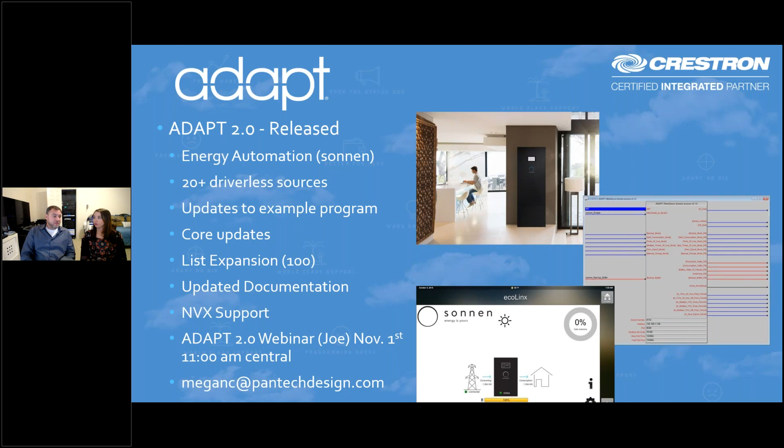Yeah, we really want you guys to attend that. Joe's going to do a deep dive on what I think a lot of the questions have been on the forums and stuff like that. He's kind of wrapping that all up in a nice bow for you. He's going to be talking about how you can do a hybrid approach to upgrades. I know that's kind of a big thing where maybe you don't want to have to go through and do every module, you just want to be able to do the core. There may be ways that could help you guys speed an upgrade along. So we really want you guys to take advantage of that. So get signed up for that and help yourself out there.

And for those of you that don't know, Joe is one of our master level programmers and developers. Yeah, he's also our trainer. He's definitely a jack of all trades. Guy's amazing, tons of fun to talk to, and really keeps things focused, staying on point. So good time value when you spend time with Joe.

All right, well, so without further ado, let's hop into energy automation and talk a little bit about smart weather forecast and backup. We're going to talk about smart configurable backup, but we're not today going to talk about smart demand control and load management. We're going to save that one for next time, that one's a little deeper. Once you understand the smart weather forecast and backup, and you understand smart configurable backup, you'll kind of get the smart demand control and load management. But I was kind of afraid I might not have enough time to do everything I wanted to do in this 1 hour that we have together, so I'm gonna save that one for next time.

So little refresher for everybody on smart weather forecast and backup. If you've attended an Adapt chat recently, you've probably seen this slide, but I kind of spent a little time on it. This time I want to take a little bit more time with this. I'm actually going to show you some things too in the near future that'll kind of help back this up. So one of the beautiful things about Adapt Energy Automation is that we've written a module that you guys get to use for weather alerts.

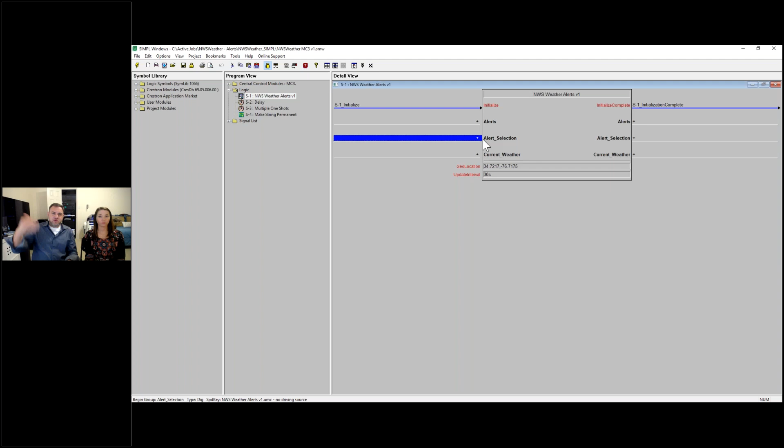But there are cases, I think, where people may want to be able to just use the weather alert. That's a good question. Any other questions? Not for now.

Okay, all right, cool. The last piece of this is current weather. Look guys, we all use Crestron's weather widget and whatnot. I use it, they're on our touch screens. It works quite well, it's kind of neat.

But I think I learned recently that their weather service was broken, and I was surprised by that. My guys told me that actually today in our production meeting. So this could definitely become a lot more useful for all of us in terms of just getting the weather data and information that we need.

And so we are going to be doing some forecast information as well, so that you guys can put it on the touch panel, show it if you want to, or maybe do things to the house based on some of that information. But really, I think the alerts are better for that.

Other questions? All right. Is there a way to test alert conditions and selection extra data without an actual alert? So yes and no. The answer is there's a way to test, but not without actual alerts, because this is real stuff and it works.

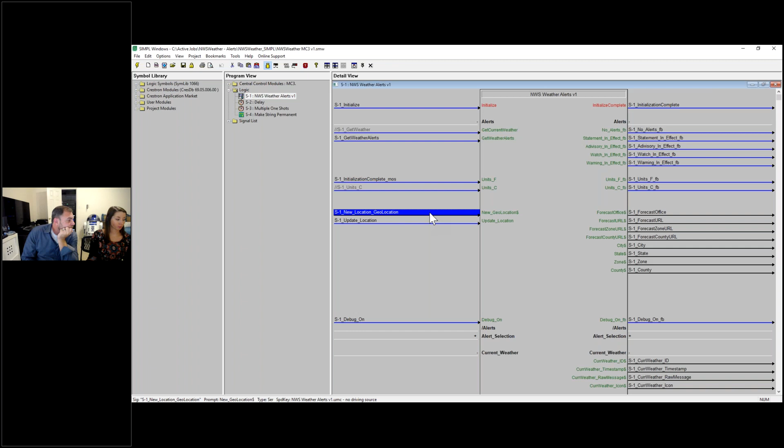Let's see, the non-smart graphics Crestron weather module is broken. Say that again? The non-smart graphics Crestron weather module is broken. Yes, that is my understanding. You might want to confirm that for me, but it is my understanding that that is the case. I'm sure they'll take care of it. You guys know how this stuff goes. I'm sure they know and they'll get it figured out.

Is the parameter just the default, falling back to the new geolocation? So I believe the question is, if I update the new location serial input, does it fall back to here? I don't have the answer to that. That's a great question, I will get that answer for you guys. I think that's probably what it is. Yeah, I got you guys, we'll get that information to you. I'll have to ask Keith.

How do you recall the default location at runtime?

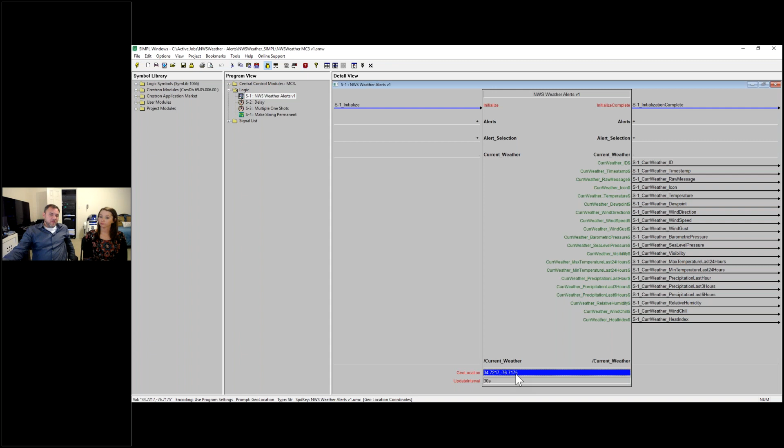Really, at that point, I think what I would do is go ahead and do it outside the module. This is obviously where the thing's going to start up. But if you deviated in terms of another geolocation, I think what I would do is put a default in there on a serial I/O and force it to be the same as the parameter, and then you're covered. So I think that's probably the best way to do that. All right, that's it. Okay, excellent.

Well, we're going to go ahead and move on and do a quick demonstration of this. Some of you may have seen this before, some of you may not have, but here is my Sonnen Ecolinx battery. This is a real live system. I've got a simulated weather event. Obviously, you see there, it's nice and sunny here in Texas right now, but we'll simulate that. But before I do that, I did want to make sure.

Okay, so I do have my backup buffer set to 20%. Now, my house, the use of my battery is strictly for backup. So normally, I'm just going to be here. But I want to show you some of the automated nature of the energy automation in Adapt.

This would normally be done when the customer is in time of use mode or multiple time of use, doing this daily cycling operation of the battery, where we're either taking stored sunlight from solar or taking grid power when it's inexpensive during the day, and storing it in the battery, then later in the evening during peak time, which might be between 5 and 9 p.m., we're actually going to use the battery to power the loads instead of the grid.

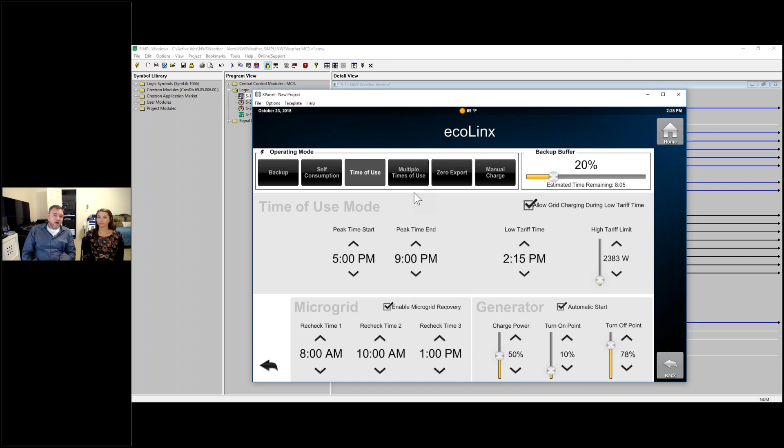If they have solar and they're using stored sunlight, you store that sunlight and load shift, or use the solar power later in the day during that peak time. So that'd be kind of the normal use of a time of use situation. Me, on the other hand, I'm backup, but you see that I'm going to leave the backup buffer alone.

We'll go ahead and simulate this weather event and see what that looks like. So now this thing's telling me, hey, we've got severe weather detected. Do you want to set the backup buffer to 100%? Yes. Now I'll pop over and you'll see, hey, we're now at 100%.

And again, like I said earlier, you guys can program all kinds of things to happen when a severe weather event occurs, and it could depend on the alert, right? If, like I said earlier, it's snow, you may want to do the snow melt thing. If it's severe weather where we think we're going to lose power, then we maybe do some other things.

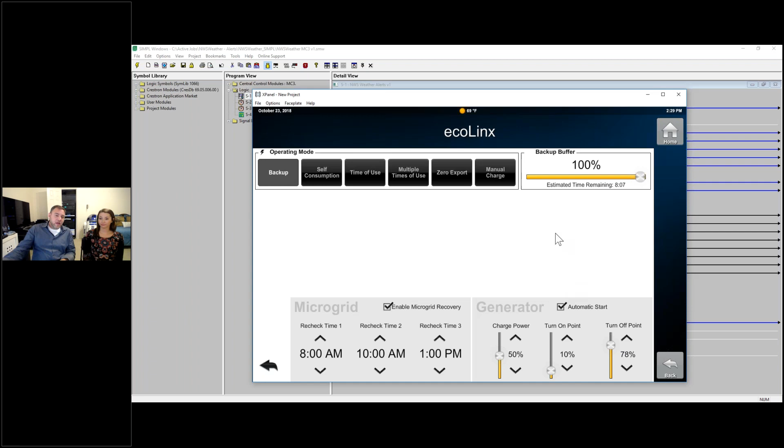So it's all about you guys and your abilities to design the energy automation system in the right way for the customer. A lot of times it's going to be based on the customer, and also based on location. Okay, so when that's over, this can return back to 20%, and away we go. In my case, I leave mine, like I said, at 100, but that's the idea.

Now, let's just say for a second the customer does not want any interaction, because that's going to be a possibility for you guys too. There's absolutely no reason why you couldn't come up with a default power profile situation for when severe weather is detected. Just always do these things. The customer knows that's what you're going to do, knows what the house is going to do, and everything's cool. And there's nothing wrong with that. You don't even have to pop anything up on the touch screen. You don't have to ask them any questions.

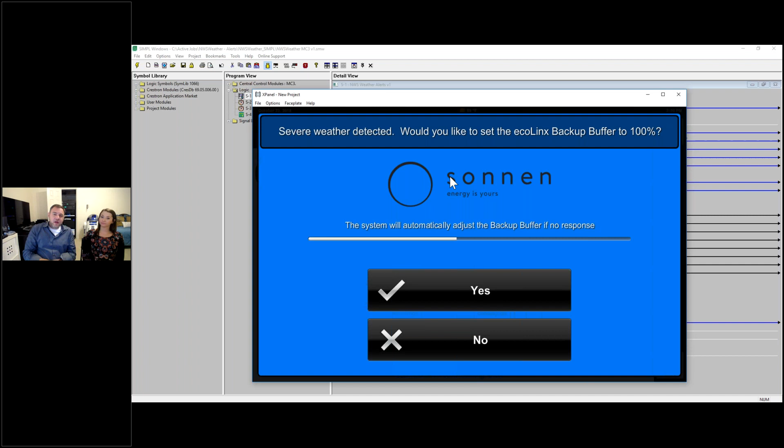We did something at the show where we flipped this around a little bit. Instead of asking the question, would you like to set the ecoLinx backup buffer to 100%, we actually asked, would you like the house to do some things as well? And that was the yes or no.

So the default was to set the backup buffer to 100% to prepare, but maybe we do or don't want to do stuff to the home, like lowering the shades or lowering the set points of the thermostats, or in some cases raising those to turn on the heaters and so on and so forth.

So I'm going to stop here, see if we got any questions. Keep it coming, guys. Nothing yet? Okay, good enough, awesome.

While I'm on this page, I want to explain what everybody's looking at in case you haven't seen this before. You see the Sonnen battery in the middle there. Down below you see a little green online indicator, meaning we are communicating with the Ecolinx battery. The bar below with the battery icon next to it is the battery life, so I'm at a full 100%. Then based on the consumption of the home, shown on the right where that blue line is, I have an estimated time remaining on that battery of about 8 hours and 53 minutes.

There's a real quick and easy calculation to go through when you're looking at the batteries and power. You'll see here I've got a 10 kilowatt hour battery, so I've actually got 5 battery modules in this thing. I could go up to 20 kilowatt hours, which would be a total of 10 battery modules, but I've only got 5. The simple quick math is 1,000 watts for 10 hours, or 10,000 watts for an hour in my exact case. Then you could extrapolate that to the 20 kilowatt hour battery, and that's how you start to build a power profile.

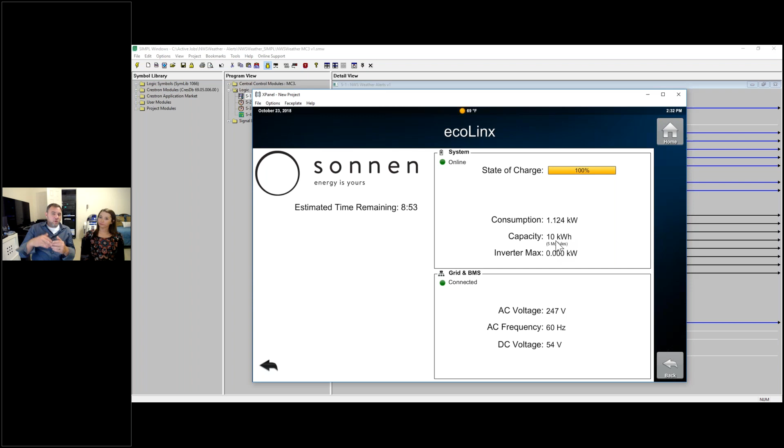When we get into the smart configurable backup, we'll talk more about that.

Last thing I wanted to talk about is just the grid. You can see that the battery is consuming about 1,100 watts from the grid, and the grid is connected, meaning we have grid power. There are actually situations where we'll have grid power but we're not going to actually take power yet, and we'll touch on that here in a minute.

Going back to the weather module, any chance you could update it to use zip codes? That is a great question. I actually wanted the same when I started playing with it, so we'll look into that. I think there's a reason why we did geolocation, but we'll definitely see if that's a possibility. I think it could be a good idea. Yeah, good question.

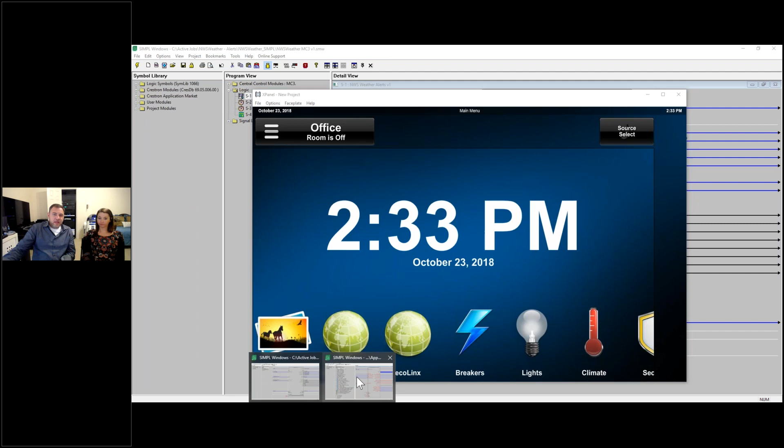Okay, well, I'm going to move us on now to look at the actual Sonnen Adapt module, and then we're going to talk about some smart configurable backup. Bear with me, here we go.

So the Sonnen Ecolinx battery in Adapt is considered an other device. In this system, you'll see it's other device 11 - we have an Adapt other device Sonnen Ecolinx module. Now the module that you're looking at here is 100% done and ready to go, and you don't have to connect anything to achieve what you're seeing my battery doing in terms of giving you the information about what's going on.

I have this backup buffer input in use because I'm actually doing some things based on the weather. So when I say yes, this battery goes to 100%; when I say no, it stays at 20. A lot of that's simply for demonstration, because like I shared with you guys, mine's a backup battery right now, it's at 100%. I am getting solar soon though, so that's going to be really exciting, and I'll be able to share more with everybody about how I've incorporated solar and what I've done there. That's probably going to be another webinar, or maybe 2 or 3, because I really want you guys to learn as I'm learning and have all the information I have.

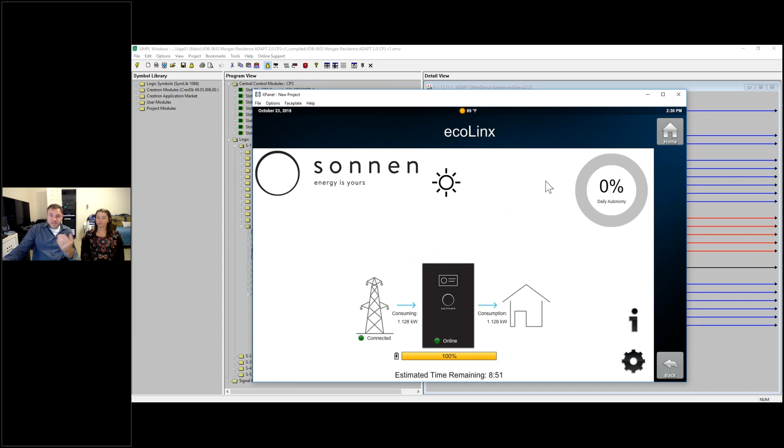You also see the slow poll time and the fast poll time, and you'll notice they're the same for me. Now, the slow poll time and the fast poll time are relative to in-use. Meaning, if I'm physically on the page, I'm going to do fast polling so I get updates every 5 or 10 seconds. If I'm not on the page, the Sonnen ecoLinx adapt module is going to revert back to the slow poll time.

And then, of course, we have our init, which you guys are used to from an adapt standpoint in the adapt modules, and you have a program is ready input. What I chose to do is run that through a buffer, and the reason is I want to have the ability in debugger to turn that on and off. That would be the only reason to do that.

So now that you've seen this module, let's go ahead and talk about the touch screen a little bit, because tying those two together will be quite helpful. All right, so the first page I want us to look at is the main page.

The reason why I wanted to go into VT Pro here with you guys is because there's a few things on my physical touchscreen that you don't see that actually are there. Like peak time active, peak time 1 active, peak time 2 active, low tariff time active—actually I see those are the same, that's a copy and paste error on my part. Anyway, really this doesn't have to be here, and then zero export time.

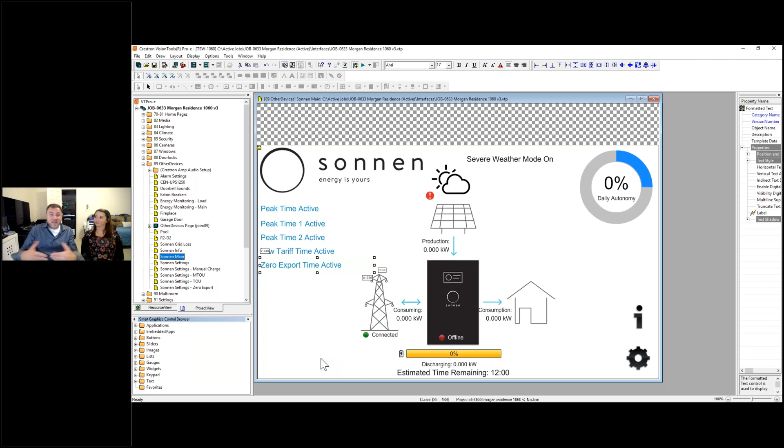These guys normally, and I spread these out, but normally are all stacked on top of each other so they all show up in one place because they are mutually exclusive. We normally put them down here. Obviously, guys, it's adapt, you can do whatever you want, put it wherever you want, have fun, right? But these guys are relative to these things.

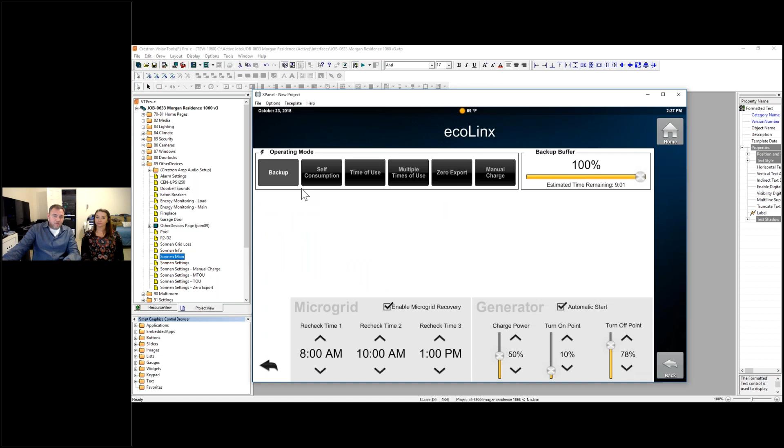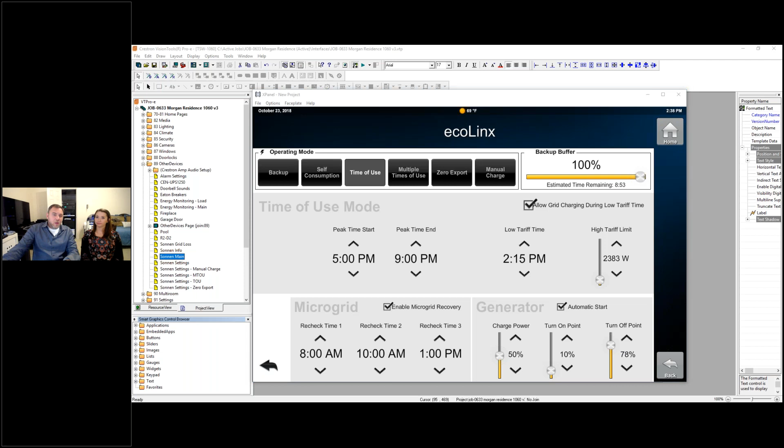So if it was 5:05, I would actually see that my peak time is active—I'm in peak time, right? So that flag is going to go high, physically on the touch screen. And again, you guys could take this and put it on the main page if you want, like maybe put severe weather mode on the main page. It's up to you how you want to make that work.

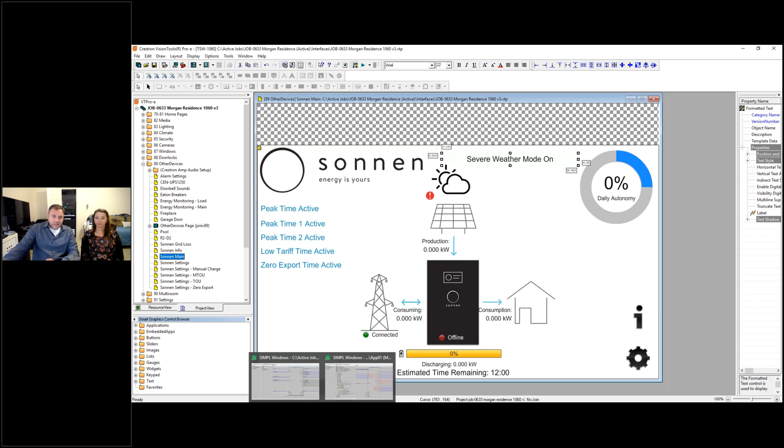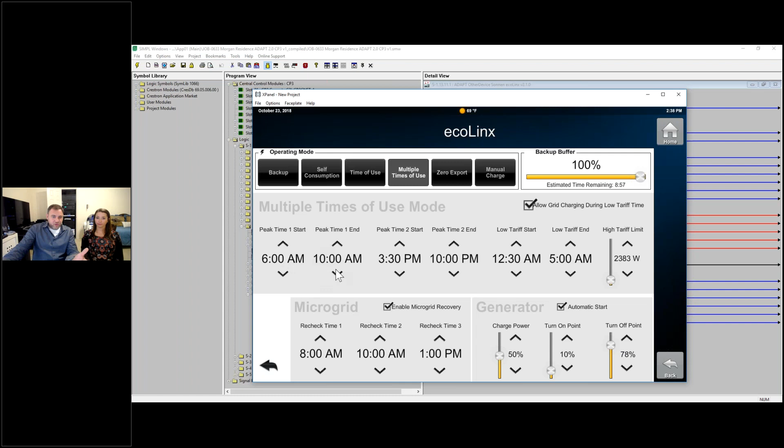The other thing is multiple times of use, so you have peak time 1, peak time 2, same thing applies. If it's between these hours, you will see that flag and it will show up. Again, there's nothing you actually have to do in terms of connecting all of that in SIMPL Windows—it's simply going to be there. You'll have to know the join number, obviously, and I have my join numbers turned off, but you can see there are join numbers there. Just looks a little muddy when I do that.

So any questions about any of that so far?

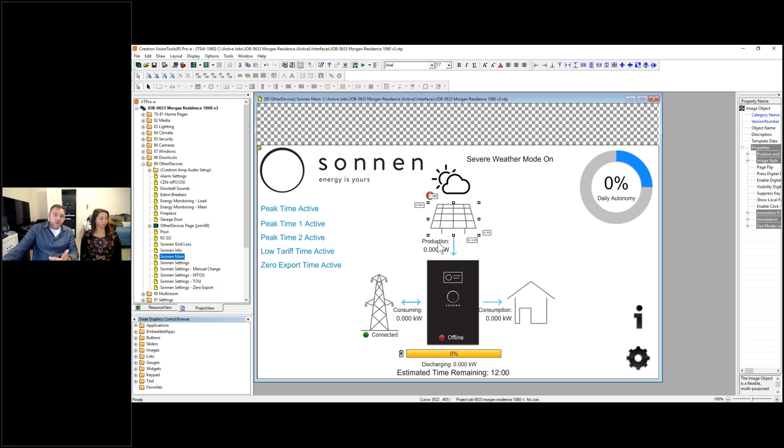There are not. Okay, again, if I had PV or a solar system, you would see this grid and you would actually see the production information. Again, it's something you can't see on mine because I don't actually have the solar. So that's the main page.

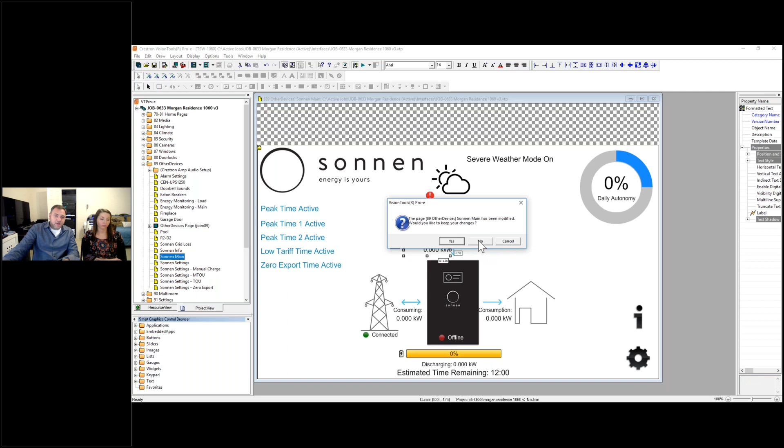The settings page is something that's kind of where the settings start, if you will. And then you will populate inside of this area based on backup, self-consumption, TOU, MTOU, 0 export, and so forth. But you guys get the ability to not have to deal with all that basically because we've already built it in.

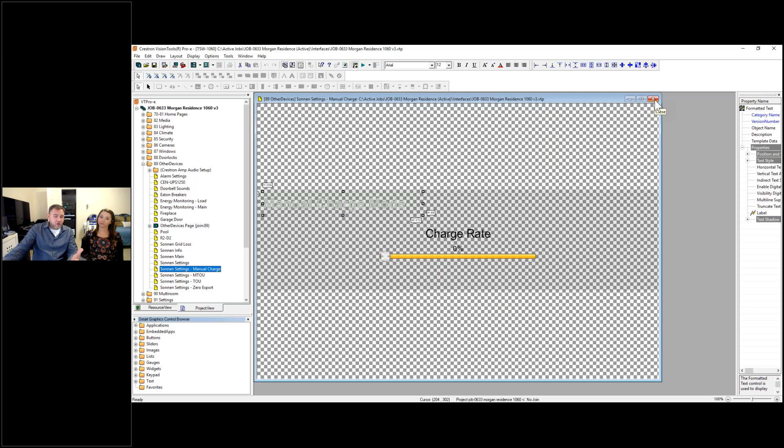So here's the manual charge mode—it's probably tough to see, but that's where you can actually adjust the charge rate. Happens to be something most customers would never do. That's another thing I think I was talking to one of the engineers at SPI, and we were just going through the touchscreen and looking at some of this stuff.

And he said, you know, I kind of feel like these guys just don't need to be there at all—the customer never will do that, it's just not something they would ever do. Totally cool, we get it, we understand. Man, if you guys want to take the buttons off, you remove the buttons, slide this thing over, and away you go. So you get some flexibility there.

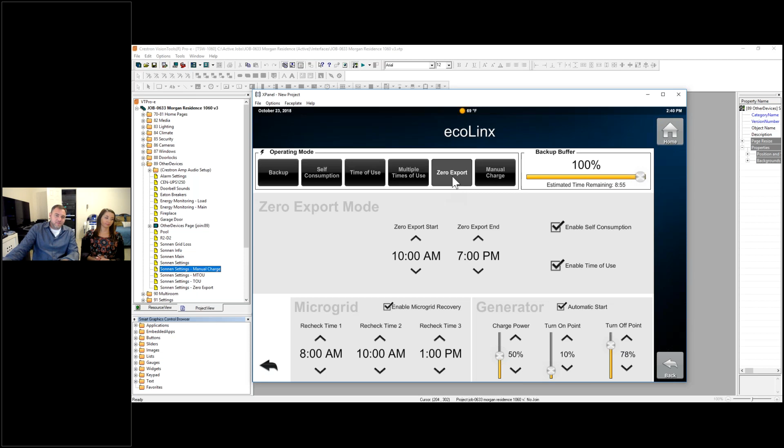Of course, it's VT Pro. Let's talk grid loss.

So when a grid loss occurs and the utility grid is down, this page will go high and is set to join number 415.

My expectation for you guys is you won't have to do anything to make this occur. Having the page pop up, you're not going to have to do anything but use the example program where all these pages exist, put the module in, do the things you'd expect, and it's just going to work. However, the next step, meaning what happens when one of these buttons is pressed, or maybe doing a default and never even popping this page up, that could be something you may want to do.

All possible, but how you actually handle these different power profiles is up to you guys and what you want to do in SIMPL Windows.

So again, back to our Sonnen ecoLinx module, here is your off-grid flag. Once that off-grid goes high, you then are going to use a buffer or some method, however you see fit, to decide, or maybe it's just one thing and that's it. But that's one way to do it.

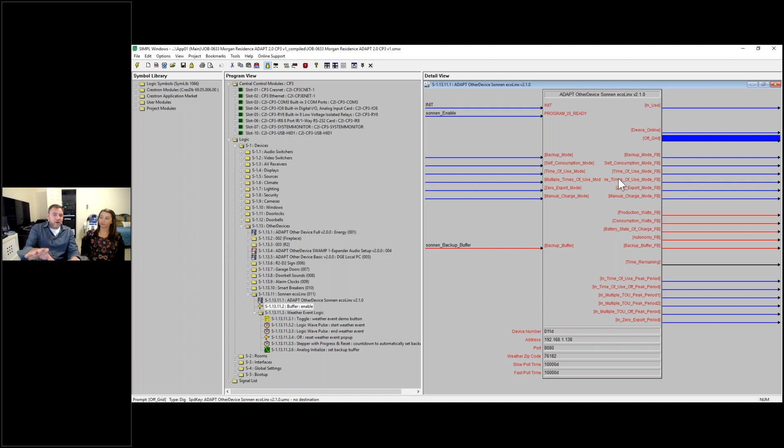Let me show you the better way to do it, and this is where it gets cool. This is where Adapt Energy Automation gets fun. Built into Adapt 2.0 and inside of System Manager, we now have a new automation tab with an energy tab at the top. There will be more added to this, I can assure you. This was just our first step and a step in the right direction.

However, we know you guys want it easy, but we also know you want it flexible. That's why it's Adapt, right? You want the quick stuff, but you also want the power. We've given that to you.

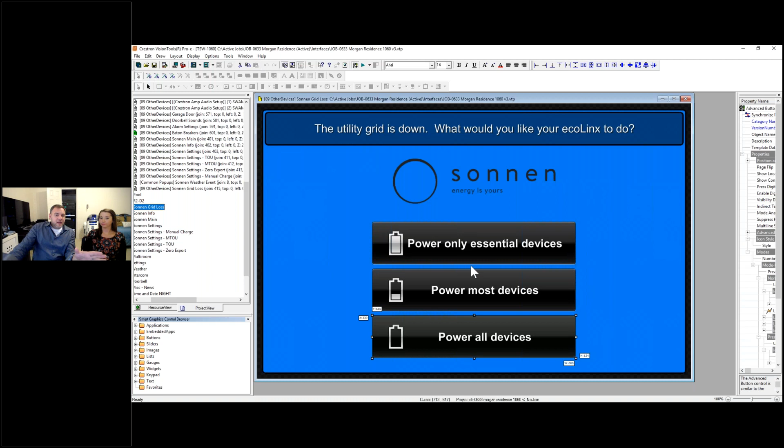So you also have the grid restore. When the power comes back, what do you guys want to do? Some people may not want to do a whole lot. Some people may not want to bring all the audio video back on.

Some people may want to not do anything to the lights. But if we're starting to control breakers and we're starting to do some relay things, and we've turned off the water heater and we've turned off the stove and the dishwashers and all this stuff, well, we may want to be bringing those back on based on restore of grid. So again, ultimate flexibility for you guys, and there will be more things added to this area.

I think we have a question, let's go ahead and answer. Have we looked at what, if anything, you can do for managing use during alert times with Crestron Lighting, D3 Pro, or with SMW?

Yeah, so the question is, have we looked at what, if anything, you can do for energy use during alert times? Oh, okay, yeah. So look, that's the ultimate place we're going. That's really ultimately what we want to be doing, is we want to be making the stuff faster, better, but it's going to come down to us learning more about typical use cases, if you will, and how we can manage use a little bit better.

So take D3 Pro. Well, if I was doing D3 and I wanted to have the flexibility, I'm going to be doing an RSD, a dedicated RSD with just the analogs for the lighting, and that's how I would then build what's going to happen with the lights type of a thing when a severe weather occurs, right? That would be one method, if you will.

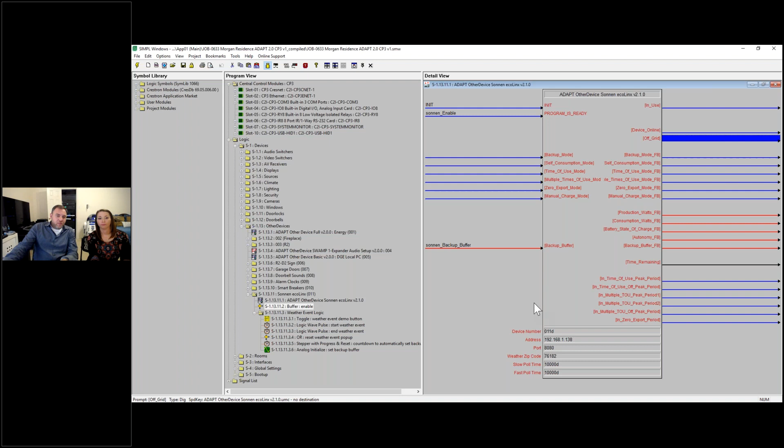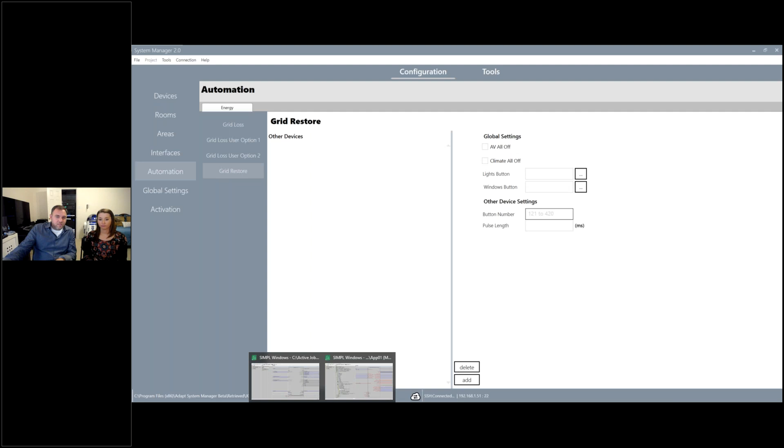Question: where do the buttons 121 through 400 get asserted in SMW? Yeah, these are other device settings, meaning as far as I remember, we're doing that on the output side of an other device module. I'm going to get clarification on that one because I haven't physically done it yet myself, but I do know it's supposed to be very simple. That's a question I think Joe is going to go over in ADAPT 2.0, some of the more detailed programming things. It's a good question, I'm sorry I can't answer it, but that's just because I haven't physically done it myself.

One last thing I wanted to do for everybody is show this in real life. I'm going to go ahead and pull up my X panel and we're going to do a live demonstration of this so we can see what it looks like. Bear with me, I thought I had that open already, I must have closed it by accident.

Great questions guys, keep them coming. Yeah, those are awesome, that's what this is for right here. Exactly. GoToMeeting is always so fun with XPanel, I think they're both resource hogs.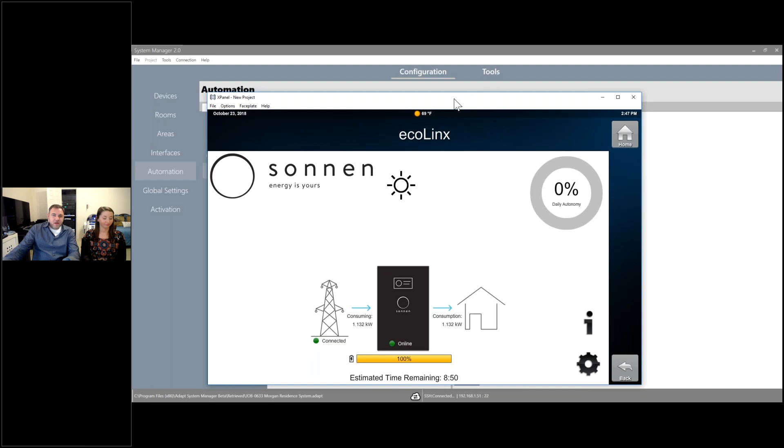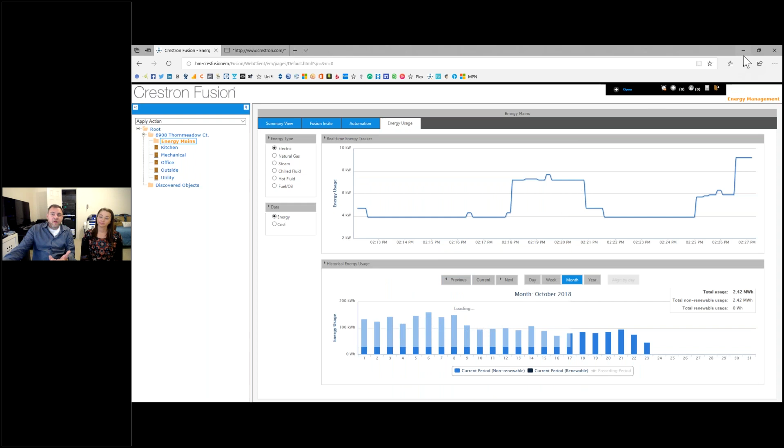All right, good enough. Okay, before I do this, let me share with you guys that the 1,132 watts that you see my home consuming is really made up of that rack of equipment. Inside that closet is also my router, a couple of NASs, my Fusion EM server — maybe we'll get time to look at this stuff. Point being, pretty much the whole system except for my Sonance amplifiers, which I did not put on the battery, as well as my two refrigerators, my freezer, my kids' bedrooms, my kids' bathroom lights, and my family room fan and lights. So when we have a power outage, I can literally sit down in my family room, pick up my 302 remote, and turn on Kaleidoscape and watch a movie. It's kind of surreal, to be honest with you, very neat. So we're going to go ahead and actually do this.

You want to go flip it? Absolutely, all right, so Megan's going to go flip the breaker. And while she's doing that, if you have any other questions, now's a great time. It'll take her a few seconds to get into the garage and flip that breaker.

So what's actually going to happen while we're waiting is within 100 milliseconds of losing power, the ATS is going to flip over and that's going to immediately take us to battery power. And because we're polling every 10 seconds, we might see it happen real fast, or we might see it happen in a couple seconds. So that's the grid going down.

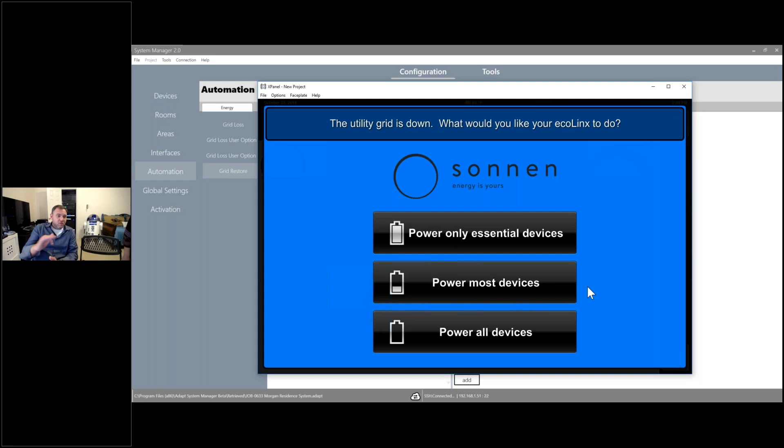Guys, what you just experienced is an online webinar that happened during a power outage, and we're fine here, everything's good. We're live, we're up and running, everything's just peachy. Let's just power all the devices — you'll see here that we're completely off grid at this point. Our battery is discharging at just about the same rate that the home is consuming power, the load on the battery is consuming. We've got about 7 hours, 55 minutes left.

And if we just hang out for a few, we'll start to see this thing going down, and you'll also see your daily autonomy number go from 0% to 1%, and then it will continue to rise. Let's go ahead and flip the breaker back and bring power back.

And guys, I got to tell you, bringing a customer over here, sitting them down, and just turning off the power to the house and putting them in this position is probably one of the best demonstrations you could ever do. It is surreal, it's amazing, what a wonderful feeling to be resilient to the loss of power. It's pretty exciting, and again, super proud to be involved with Sonnen and what they're doing. There's so much more to this, guys — I can't wait to start talking to you about VPP, what that means, and about the utility grid and how we're going to be helping.

It's pretty exciting, you just noticed that we are now connected to the grid. That does not mean, however, that we are actually taking power from the grid yet. This is a really cool thing for us and our customers, but also a necessary and required thing based on UL and IEEE requirements. The reason why we're not taking that power is because we have to wait 5 minutes before we are allowed to accept power from the grid. What the Sonnen battery is doing right now is it's actually looking at the stability of the power itself, looking at frequency and things like that. And if everything checks out in 5 minutes, that's when the ATS will flip back over and put us back on grid power.

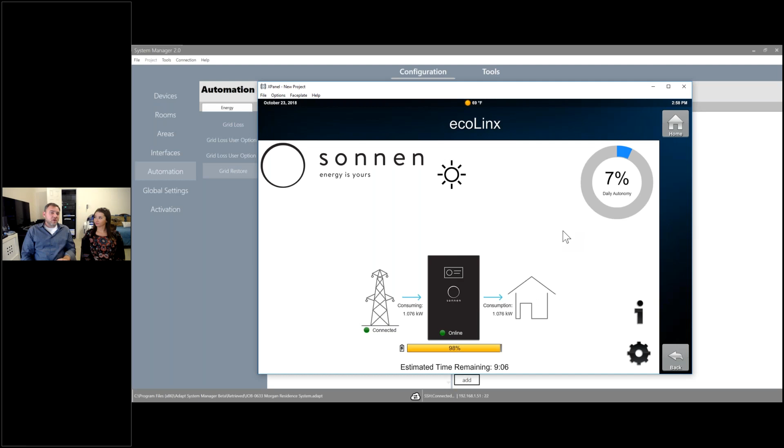My absolute favorite thing about Sonnen has been the relationship between our development guys and their engineers. They're actually making changes right now to their API to make it even faster, even better. We have to make a few different API calls to get some of this data - that's going to change, and things will be done a different way where we may not even have to do any polling at all. It's a wonderful thing to work with a very forward-thinking, innovative, but also great company. Fantastic company to work with.